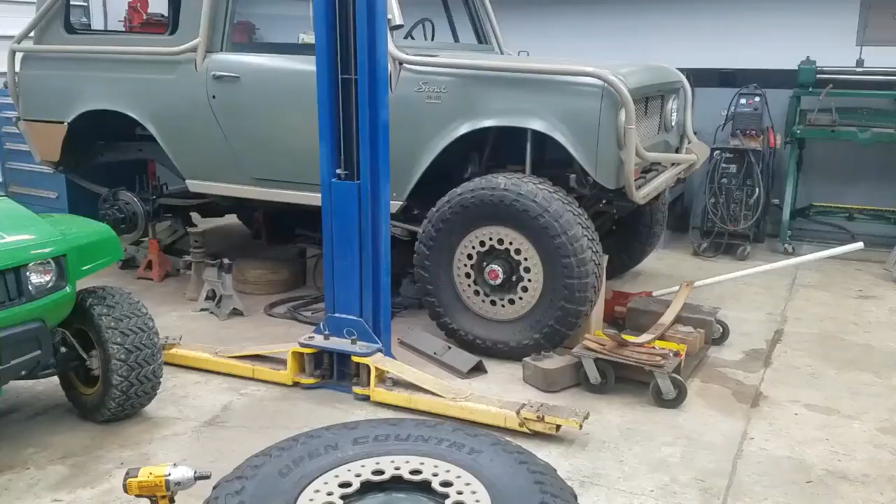All right, so today's mission is to do a little machine work to these beadlock wheels for the Scout. And I'll explain to you what a beadlock is. When you're doing off-roading, rock crawling, even going on to a sandy beach, it is ideal to have your tires aired down as low as possible, basically.

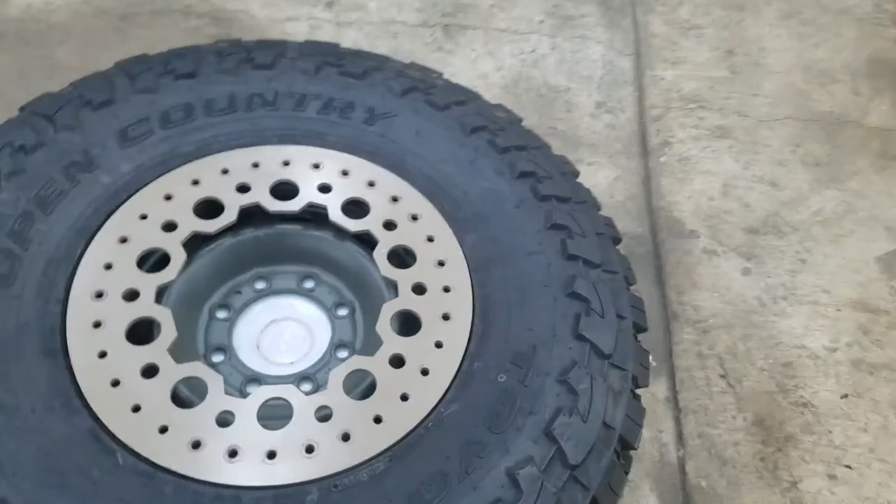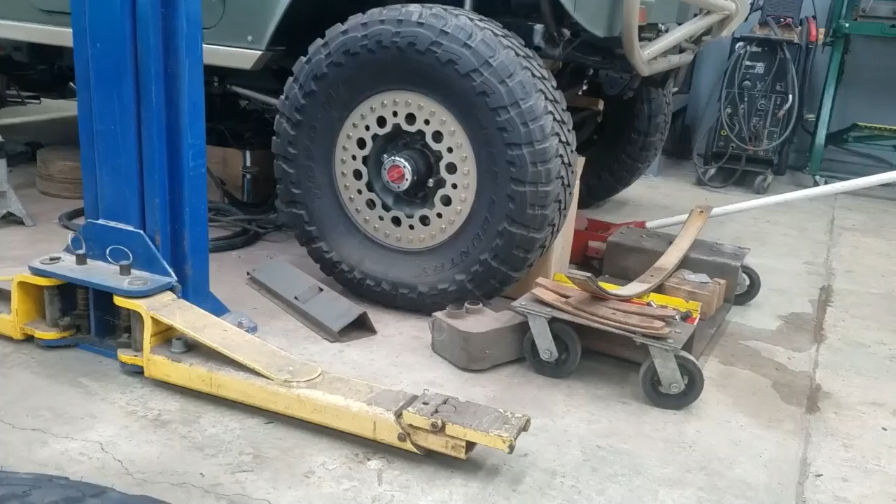Because what happens is, if you have a tire that is inflated rock hard, and the vehicle is sitting on the ground, it is going to form a radius with the ground. Very little contact. But if you notice on that tire, see how it's squatting down? That tire has a low air pressure in it, and it allows the bottom of the tire to conform to the surface it's on. If you're on a flat surface, it makes a big flat contact patch. If you're going up around a rock, it will kind of conform to the rock and grapple around it.

So, in order to deflate your tires, you let the air out. The problem with that, it is the very air inside of the tire that keeps it held to the wheel and keeps it sealed with the wheel. There's no tube inside of one of these modern tires. So, when we let the air out, down to a low pressure, the tire has a tendency to what we call unseat from the bead.

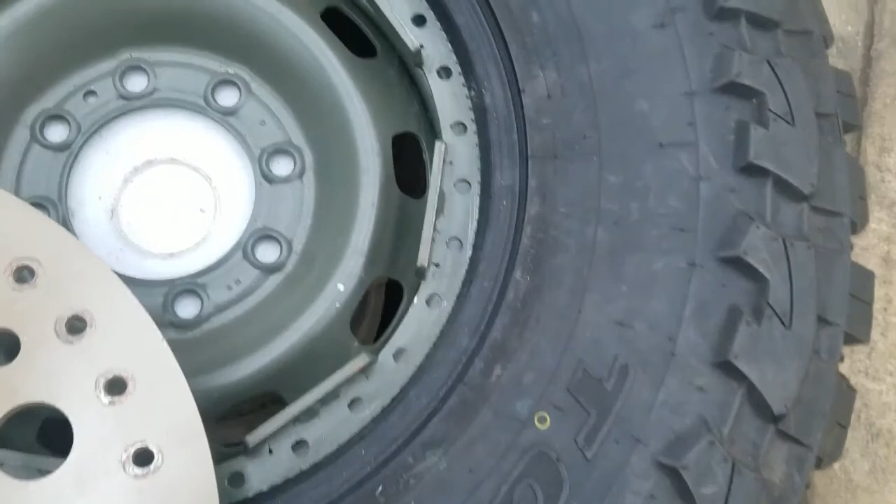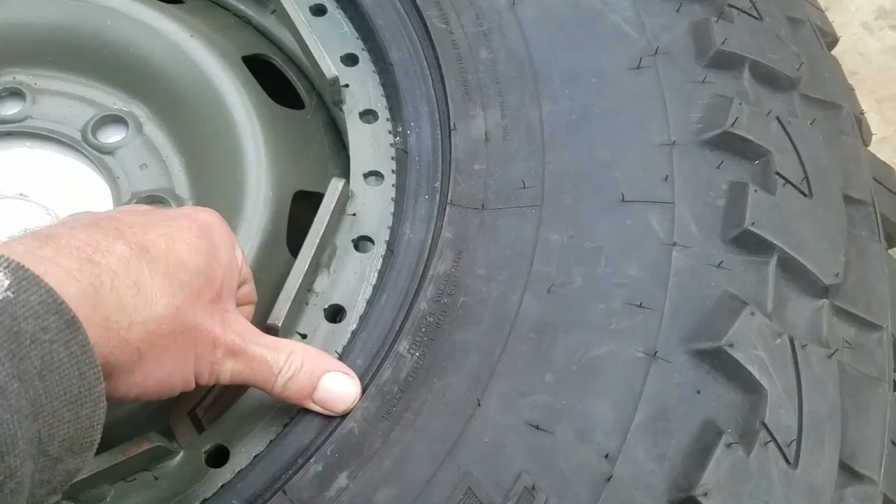So the bead is this area of the tire right here, and on a normal wheel, this would be wrapped around by the steel or aluminum of the wheel itself. So here's a junk tire. You can see how the wheel wraps around the tire and the rubber's underneath it. When it inflates, it forces against the wheel, creating a good seal. When you let the air out, you don't have enough pressure to maintain that seal, and the tire deflates at the worst possible time.

So the solution is to use a wheel that is called a beadlock, and that's what we're looking at right here. This wheel, basically, the tire is on the outside face of this surface right here. And what we were going to do is clamp the bead of the tire to this surface under a lot of force. And that way the pressure in the tire can be lessened and you still maintain a good seal. Keeps the tire from slipping, and you can do some hardcore off-road action.

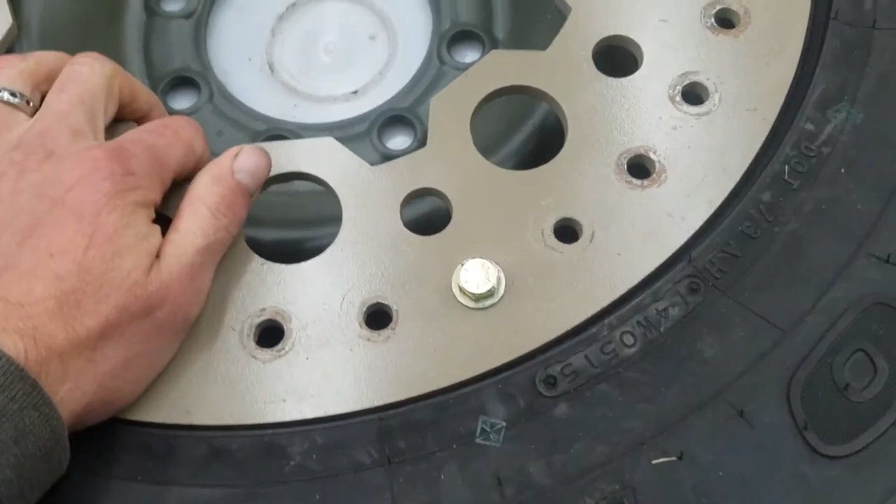So this is a beadlock ring, and the ring is secured to the wheel with 32 bolts. All right, so I'm going to rotate this so it lines up. All right, so one of those bolts goes down through there, and then if we look around underneath, the bolt protrudes, and we put a nut on the other side, and we do that 32 times around the wheel. That would normally be wonderful.

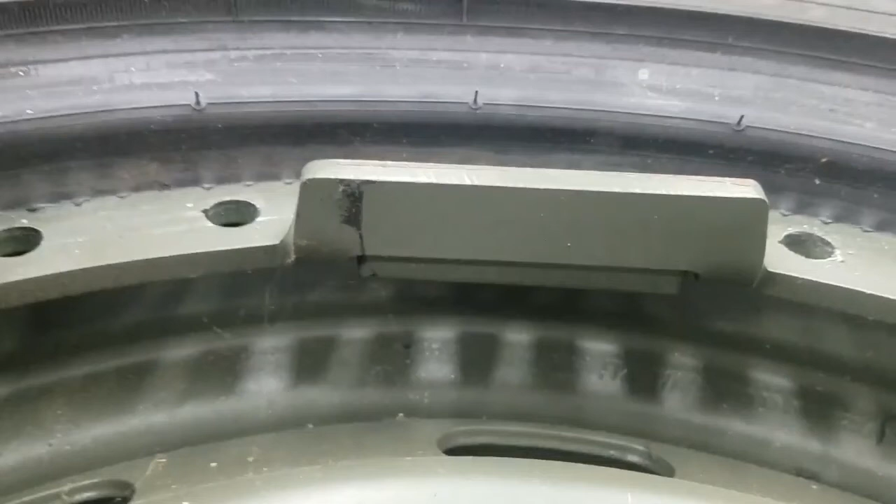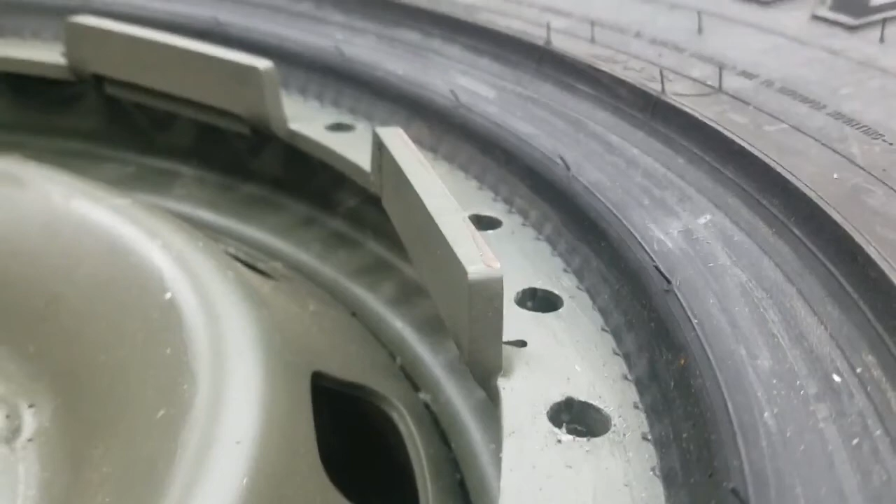The problem that I'm facing with this wheel is it was designed for a tire that had a thicker bead. All right, so I'm running these Toyo Open Country mud terrain tires, and the bead here has a thickness, but adjacent to the bead is this anti-coning lug. So the idea of what's supposed to happen is this piece of metal and this piece of rubber are basically supposed to be the same height.

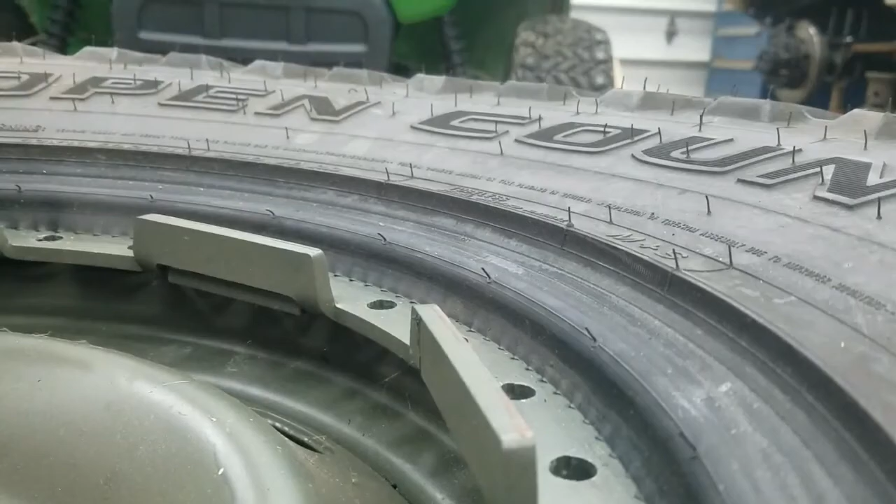And that way, when we put 32 bolts in here and we torque them to spec, the beadlock ring itself basically stays flat. It doesn't turn into a cone. If this was not here, all of those bolts and all of that force would cause the beadlock ring to cave in or turn into a cone. So by having this here to jack up the other side of the bolt, it allows good force and distribution of force onto the bead itself.

We have an anti-coning lug that is too high. All right, and this tire has a bead that is too small for it. The solution, we could get another tire.

That's not happening. These are pretty expensive. We could machine down these lugs so that they are shorter. That would require me dismounting all 4 of the tires that I already have mounted, putting them in a mill and machining them down. That's quite a bit of work.

The other problem with that is if I ever do change tires and I end up with one with a thicker bead, unfortunately the wheels will have been machined to the bead thickness of this one, and it kind of doesn't allow those wheels to work as well. So I came up with an alternate solution.

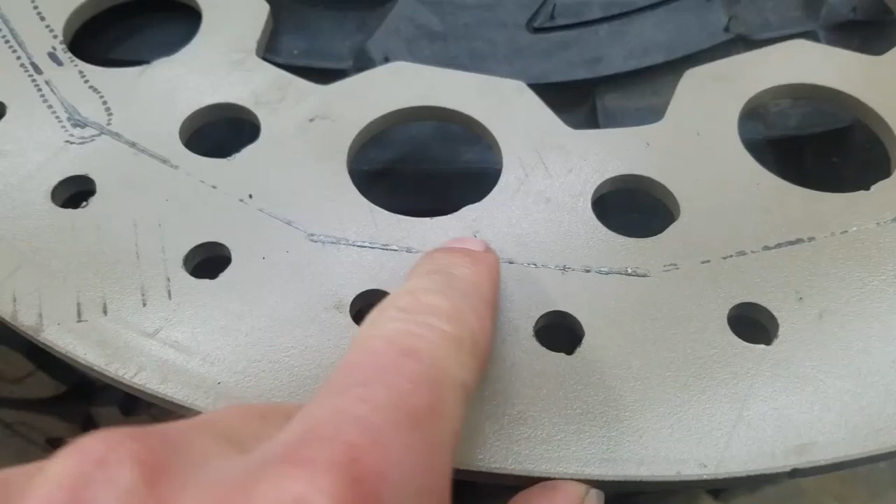I decided that if I took the beadlock ring and I flipped it over, you can see exactly where those lugs were contacting this ring. If I machined a slot that was the difference in thickness between the two so that the beadlock ring could sit lower, it would be a great solution, because I could use this ring in that position.

If I ever get a thicker tire, I can turn this 22 degrees or whatever it works out to be, and I could put it on a surface that has not been slotted. So that's what we're going to do. I kind of drew on here with a Sharpie roughly what that slot's going to look like. And this has 8 of these surfaces around the wheel. So 360 divided by 8, we got 45 degrees in between each one.

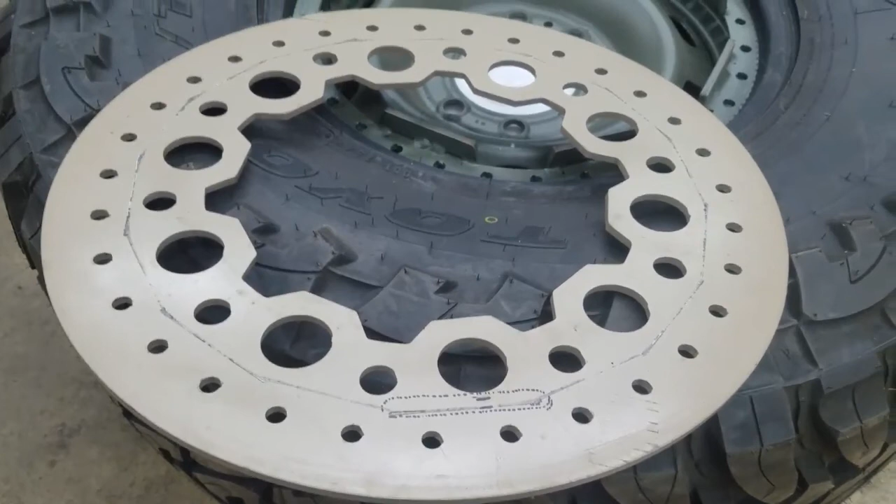So we're going to write a program, and it's going to cut the slot. So the slot at the 6 o'clock position would be here, but then we're going to take that slot that we program and we're going to rotate it to here and over to here and so on and so forth all the way around the ring. And we're going to utilize the rotation feature that we can program into a CNC mill.

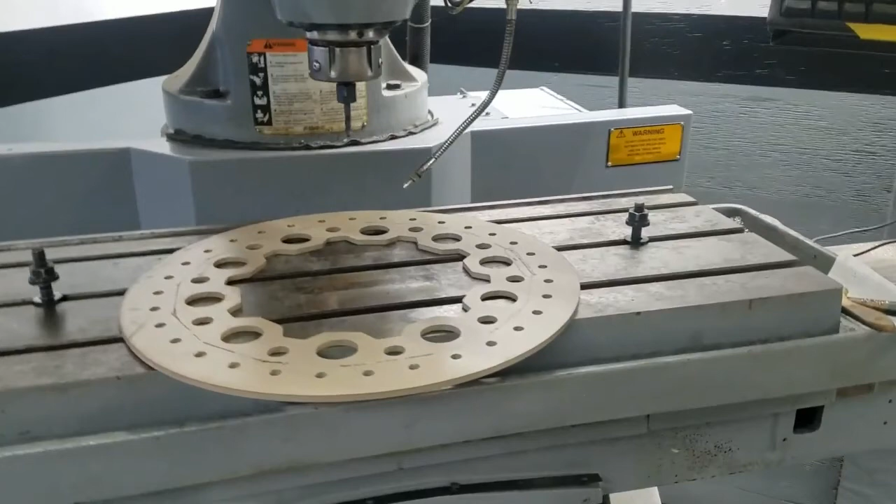Okay, so I have the part sitting on the mill table. I have not bolted it down, but I am kind of getting an idea of how much axis travel I have. Now, of course, I am shy by 2 inches in the Y. I have 14 and I need 16. I've got plenty of X, but it's the Y that's going to catch me.

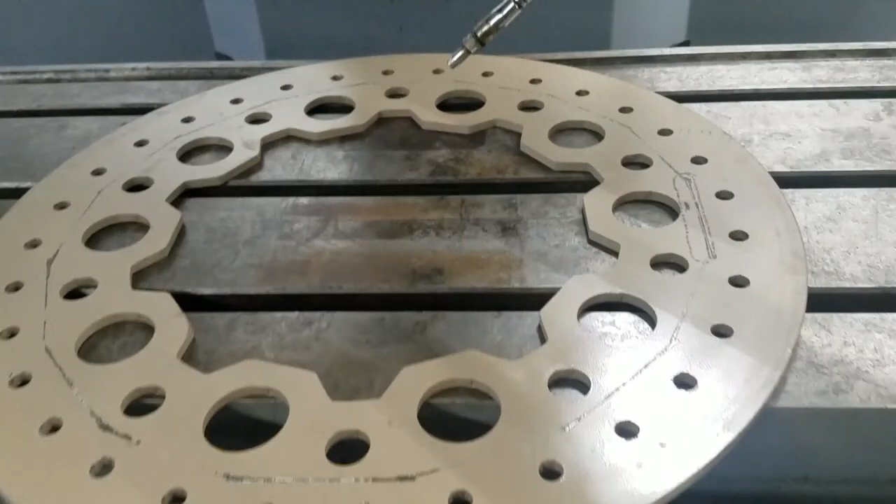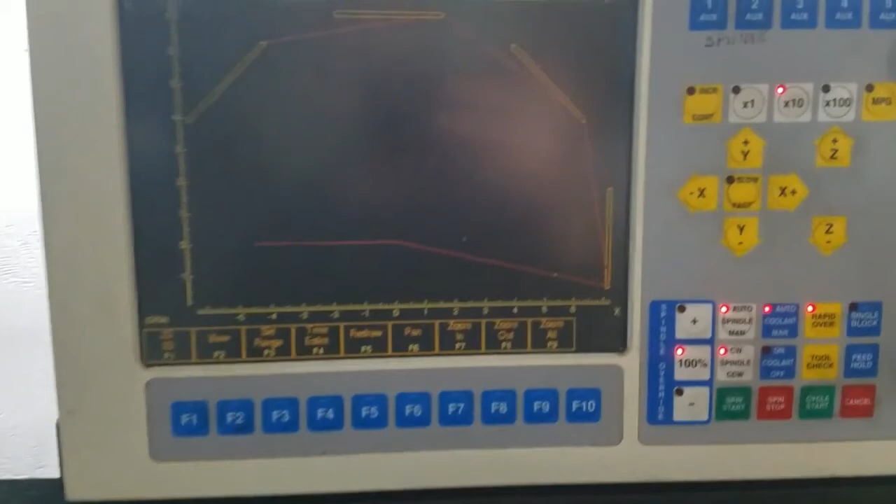So what I've decided to do is to break this down into 2 different parts. We're going to mill this one, this one, this one, and this one. Okay, that's going to get us 4 of the 8. In other words, we are going to be able to mill 4 of the slots of the 8. We're going to rotate the part 180 degrees and use the same program to machine the other 4. So this is basically what the program is going to look like, and I'm going to show you how I program that using rotation next.

Here we are in the simulator. I've written a contour that uses an end mill, and it goes around in this oval shape. I chose to do it this way instead of plunging the tool and going right down the center to create the slot. It's better to use a smaller tool and to actually turn this into a pocketing or a contouring toolpath. Gives us better surface finishes, better accuracy, and so that's what I ended up doing. The result here is basically to give me a slot exactly to the dimensions that I want.

So I wrote that one instance. Now, we need to do 8 of these that are rotated around that circular part. So there's going to be 8 instances. Each one is at a different position on that circle. And we have a trick for doing that. Our programming codes in FANUC formats allow for a G68 code, which will rotate everything that you program on the coordinate plane. So this is pretty slick.

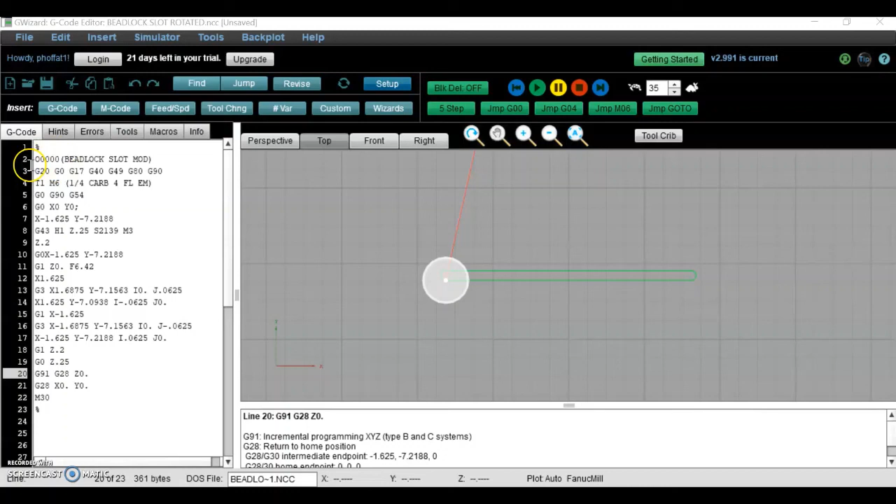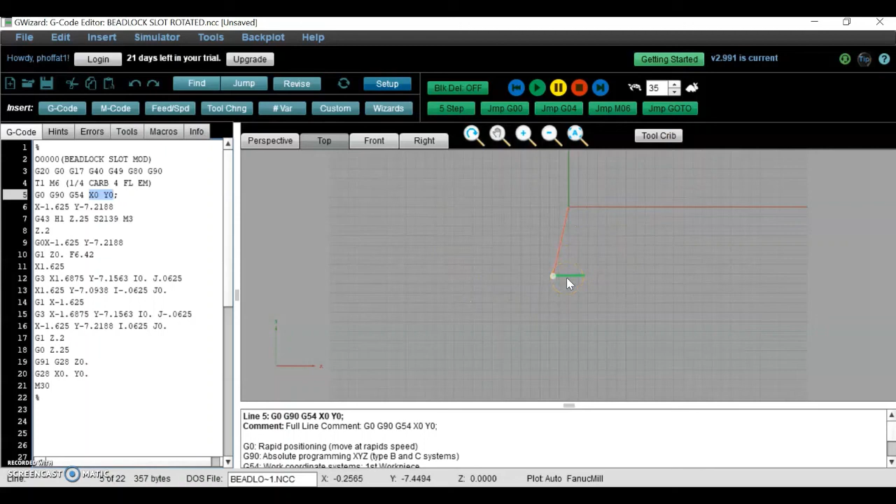And just to take you through the program before we incorporate that, standard stuff, program number, safe start, we load the tool, and I have it rapid into the center position of the circle, which I've defined as the origin. All right, so in other words, to zoom out, this is the center of that circular part. Now you can't see the part on here, but that's the center of it, and this is where the one slot is going to be machined in reference to that.

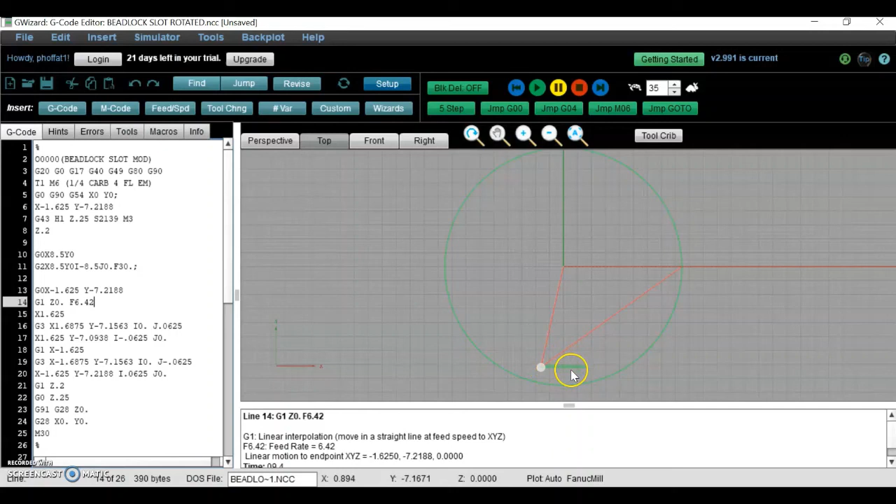So I went out on the machine and I mocked up this setup, and I discovered that with the size of the part and where the column of the machine is, I don't have enough travel to get to this one slot. I'm short by like half an inch to an inch.

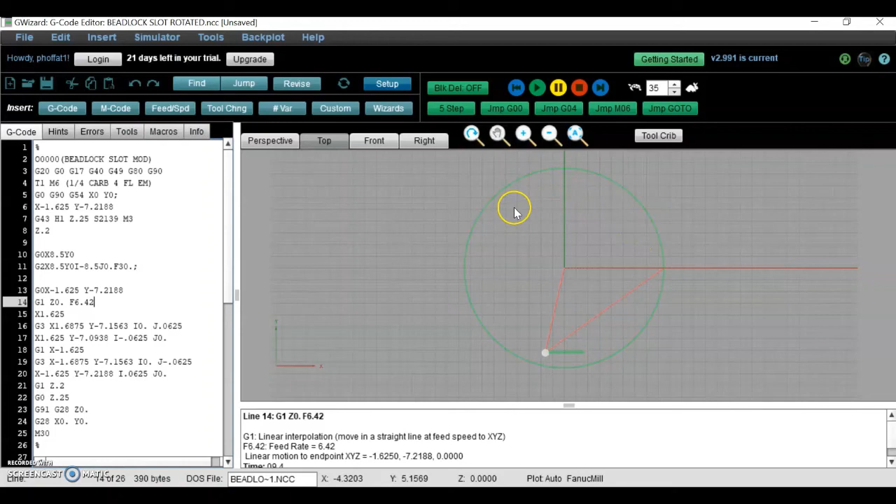So I think I mentioned earlier, what I'm going to do is I'm going to cut this slot here at the 3 o'clock position first. And I'm going to cut the slot here. And then I'm going to cut the slot at 12 o'clock and then the slot here. That's going to give me 4 slots. And I can rotate the part later 180 degrees, cut that same program, and that will give me access to the other 4 slots.

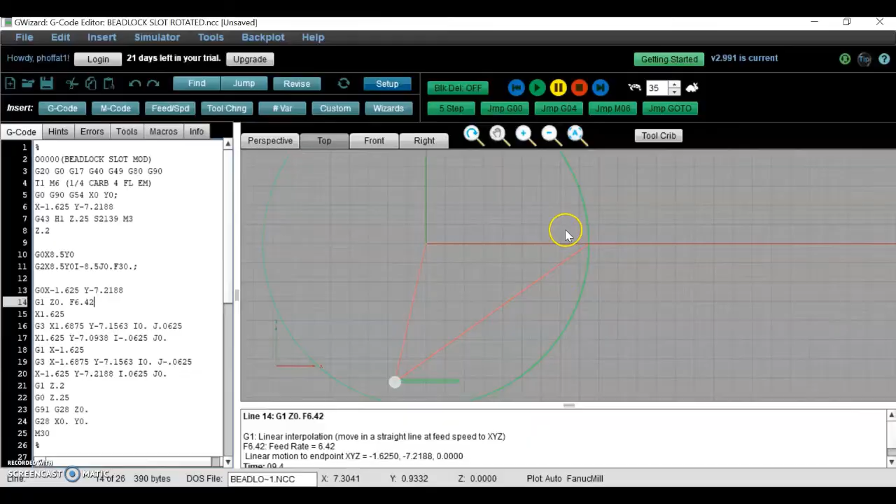Okay, so unfortunately, I programmed the first slot here at 6 o'clock position, which is a position I can't even get to. So I could reprogram that slot contouring operation for a vertical orientation right here at 3 o'clock position, or I could invert all of my positives and negatives and cut it up here at 12 o'clock position. Positives and negatives in the Y, I should say.

But I'm going to go ahead and just jump into the benefits of the G68 code, and I'm going to rotate that slot exactly where I want it. Okay, so I'm just going to create some space in my program. This movement right here rapids to that very first start point for the slot.

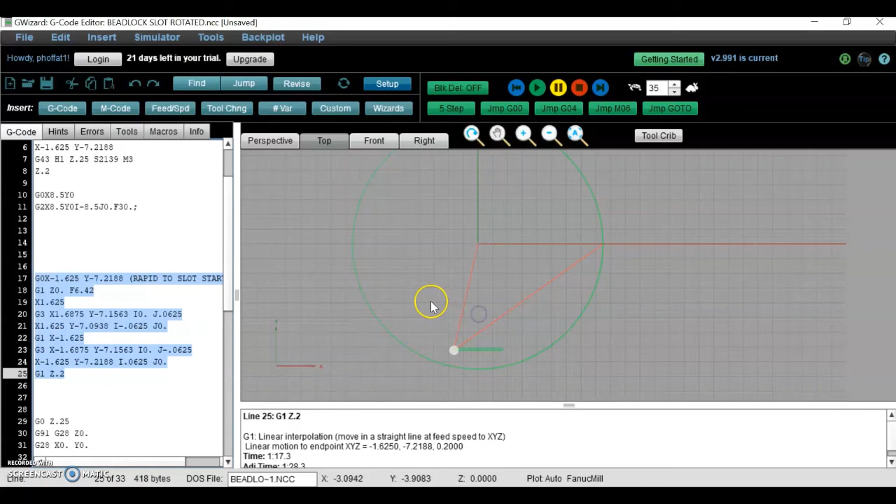Okay, and then it plunges to depth, it feeds linearly in the X, it cuts the arc, feeds linearly, no, it cuts another arc, feeds a linear arc, and then it lifts up. Okay, so this package right here is everything that is utilized in order to cut that one slot. So what I'm going to do is I'm going to take that one slot, I'm going to rotate it.

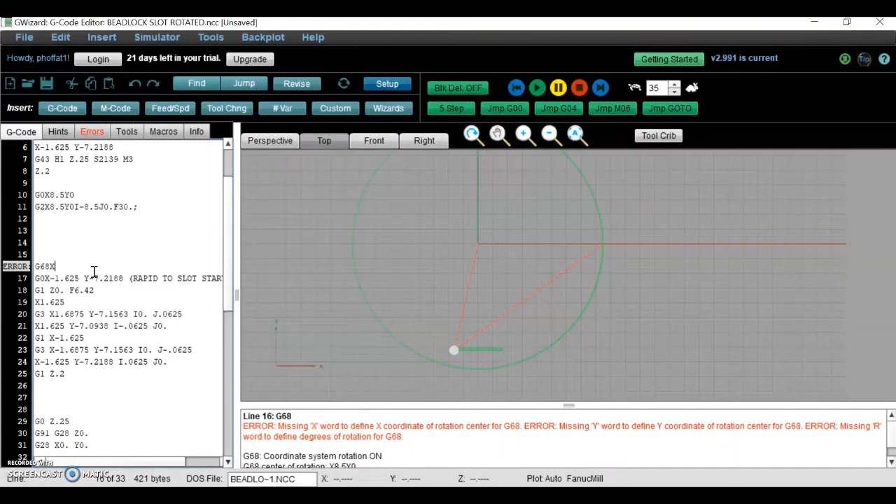So right before that sequence of operations that cuts the slot, I'm going to throw in a G code that is G68. I am going to put the X and Y position of the center of rotation. In other words, I want my slots to rotate on this circle, and the center of the circle is smack dab in the middle of the part at X0, Y0.

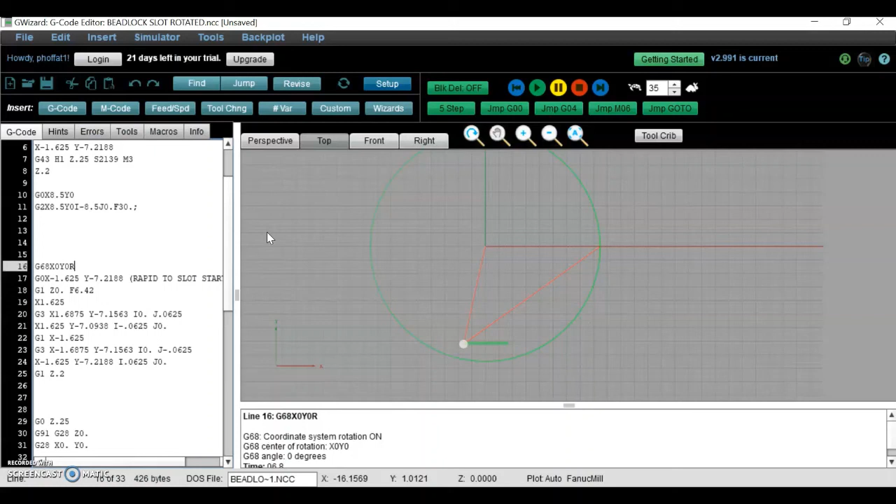That is the center point of rotation. If you were to draw this circle, that's where you would put the compass point. So I'm going to call that center point of rotation X0, Y0. And then finally, I put an R value in, and R doesn't mean radius here. In the context of the G68 line, R means rotate. So I'm going to put the number of degrees that I want it to rotate.

And right here is where it created the first one. I don't want it to be here. I want it to be 90 degrees out of phase from here. So my rotation angle will be 90 point. And did you see what just happened? That was it. That's all I had to do.

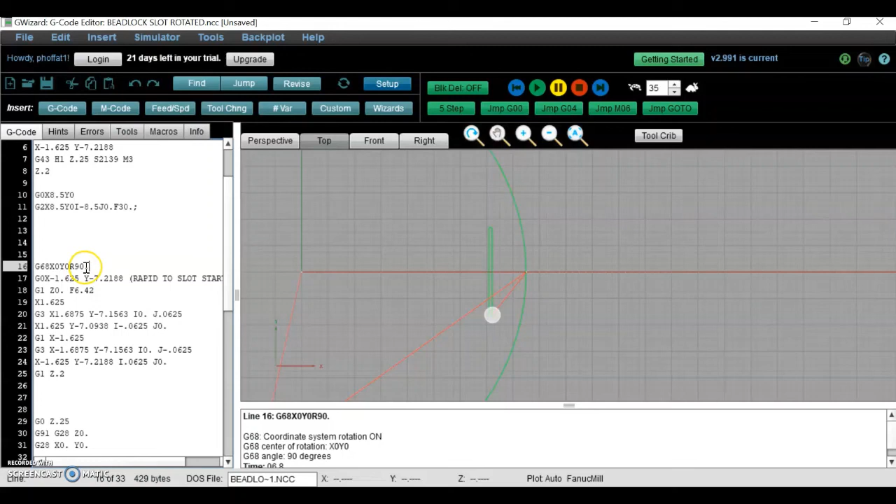G68, the center point of rotation at the origin, and R, the number of degrees that I wanted it to rotate. And then it rotated the whole coordinate plane and it ran down through here and cut out that slot. Okay, so that is the first instance. I'm just going to put a little break here.

Rotate and cut slot 1, and make it real visible for everyone. And I'm going to copy this, and, I don't think I copied it right. At the end of that particular operation there, it is going to get another flag, another marker, and we're going to call this, just call it end of slot 1.

All right, so it's real plain to see what's going on there. Then the next thing I should point out is I could use a sub-programming technique. I could use a macro technique. I'm going to keep it simple. I want you to focus just on how this G68 code works.

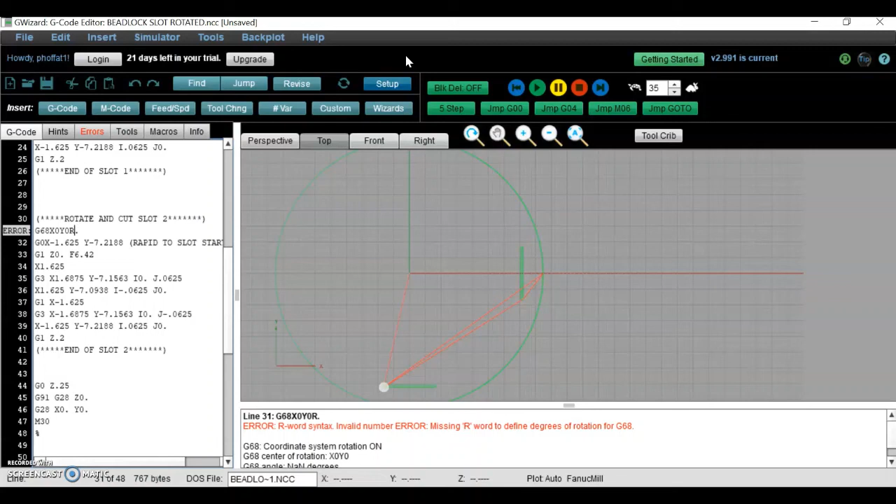So instead of 90 degrees, my rotation angle is going to be 45 degrees further than the one it just cut. So in other words, the one that was just cut was cut at 90 degrees. The next one's going to be cut 45 degrees further than that one, for a total of 135 degrees from where that first toolpath was written. And there we go. So we can see that slot in position where we want it.

I'm going to copy this, and we're going to paste another one. This is going to be for slot 3. And here we're not going to use 135 degrees. We are going to go 45 degrees further, and that would be a total of 180 degrees. So there you see it. So slot 1, slot 2, slot 3.

And now I'm going to go on to the next one, slot 4. And this is going to be the final one for this program. So we are going to take 180 and we're going to tack on 45 degrees to it, which is 225 degrees. And that gives us the final one that we're looking for. So slot 1 here, slot 2 here, slot 3 here, slot 4 here. That gives us half of the slots that we need.

So when I get out to the machine, I'm going to cut them because I have travel to get to those, and then I'm going to rotate the part 180 degrees, and I'm going to, on the same part, cut the same program at different orientation, and that's going to give me slot 5, 6, 7, and 8.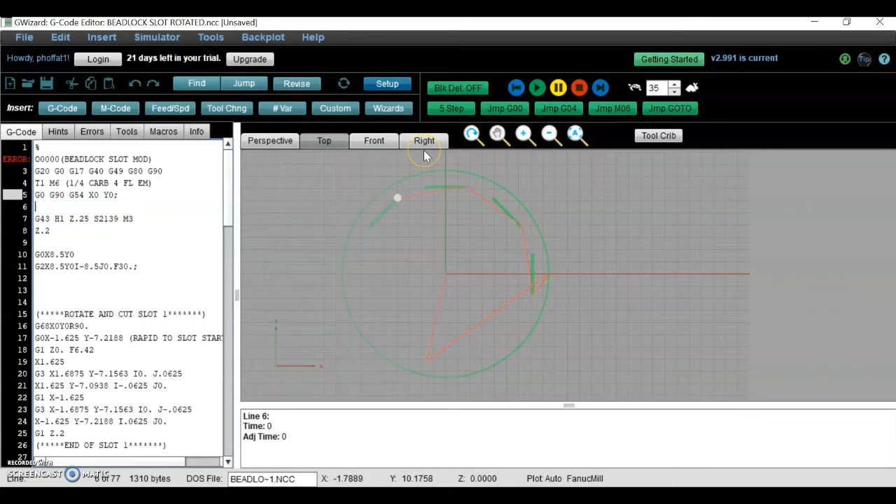Okay. Now there's one thing I want to clean up here. It's rapiding right here to that position. So up earlier in my program, yeah, right here, it's doing a positioning move to where it thought the very first slot start position would be, which was this guy. But at that point, there's no coordinate system rotation yet. So I'm just going to delete that. That's a little bit redundant. And hopefully that goes away for me. There we go. That took a little while.

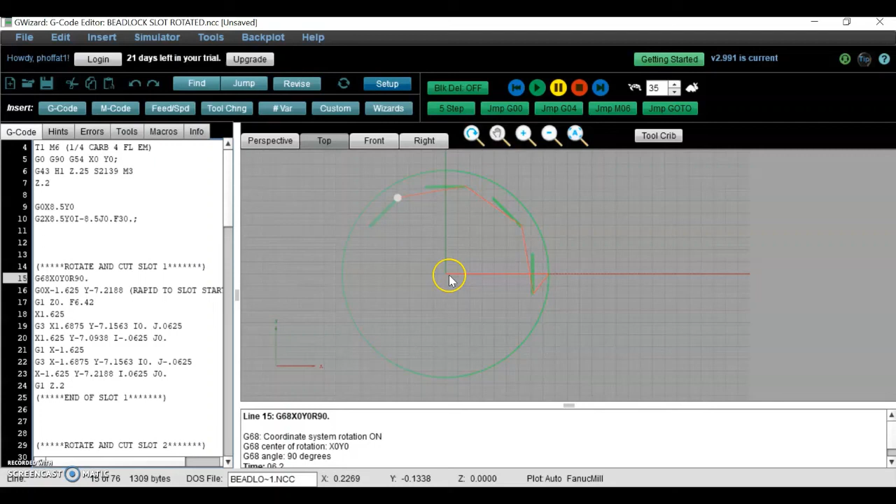All right, so just to recap, G68, pretty simple. You throw that code in and you give it an R value for how much you want it to rotate your coordinate system. Everything that you program is going to go for a ride on an angle. And we define where the center point of rotation is for that whole rotation scheme. And I use the origin because conveniently that's where I place the origin on the part, right in the center of the whole works. And that's it. So now we're going to give it a try on the machine.

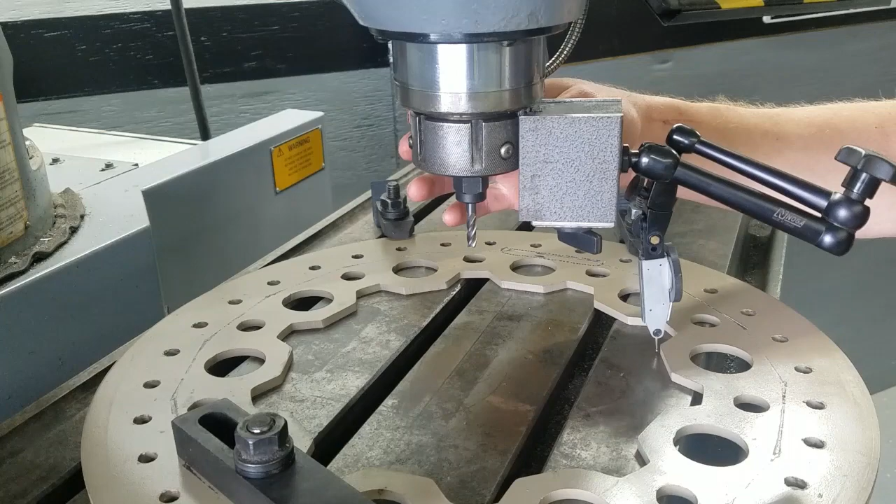So I've mounted up a Noga indicator. After clamping the part down to the table, I've swept around the interior surface. Now this is a laser cut part, so it is a little irregular. We've got a little bit of a draft angle or taper on the cut. So I've just gone around it and gotten the indicator to be a happy average between all of these interior surfaces, and that places the spindle center line in the center of the part feature. I'm now going to call this X0, Y0.

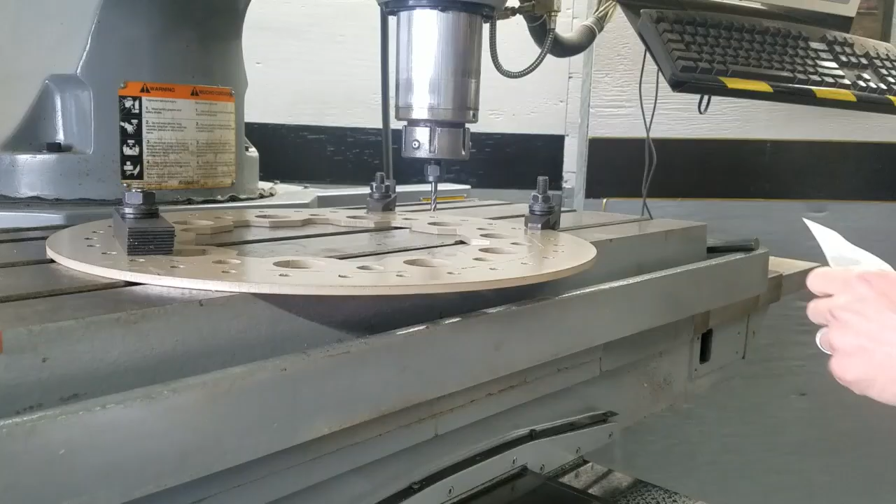And now I'm going to bring the Z-axis down, and we're going to get a touch off of this piece of paper, and we're going to qualify the tool based on this position. Okay, and there's a light drag with the paper. That places the tool 4 thousandths away from the surface that I want to be Z0. So I'm going to qualify this tool accordingly, and there we go. All right, so we're going to try it.

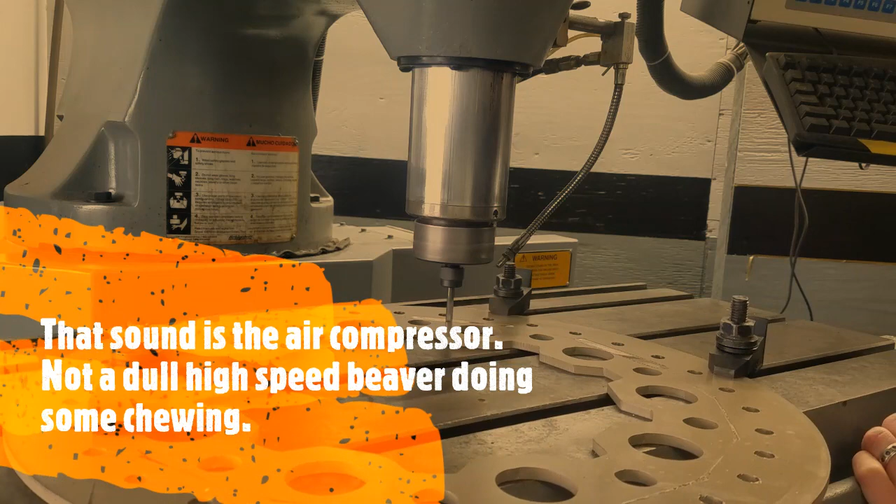Okay, so looks about right. I've got to move that last clamp. I wasn't really thinking, and it's in the wrong place. So I'm going to move that, and then the scratch pass looks good, so we're going to go to full depth, and we're going to cut it. All right, fire in the hole.

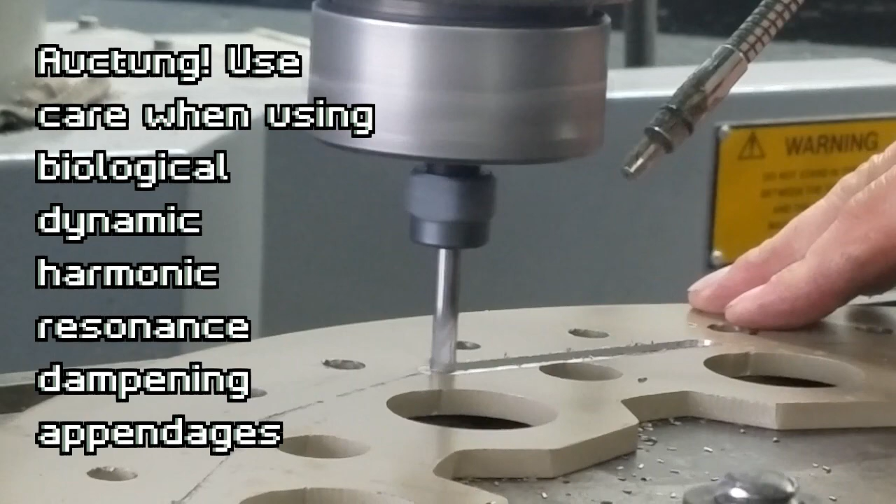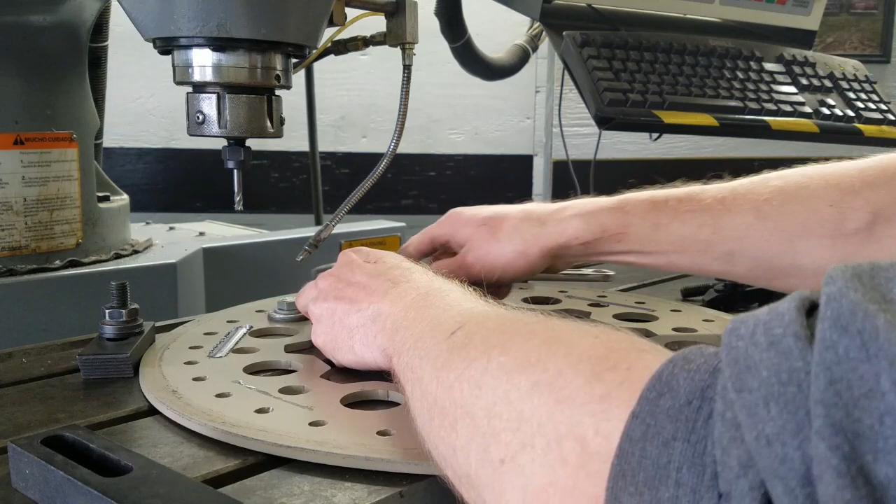Everything has been cut. For this section of the part, we have 4 of these slots cut. Now we're going to rotate this 180 degrees, and we're going to do the other 4. So I thought I'd take a moment and show you a little bit about how I set this part up. I have these hold downs and step clamps, and you're all familiar with how those work. But these two right here are not merely clamps. What I did was I took some step clamps and I utilized them so they serve as a stop.

So what's going to happen here is, as I need to rotate this part 180 degrees, I don't want to have to indicate it again. And in fact, when I get the second or the third and the fourth beadlock ring, I don't want to have to indicate those either. So these I have bolted down to the table, and when I placed this in here, I located it against there. That served as a V-block in essence, a vertically oriented V-block, and that aligns this right in place.

So what I've got to do now is I've got to spin this 180 degrees. And when I put it into place, it should go something like that. It's going to cut this slot, this slot, this slot, and this slot, bringing us over to the last slot that we cut and completing the part. So theoretically, when I clamp this down, my XY location should be good.

Now I am going to also show you how I went about orienting this, because I want these slots to be oriented with these holes, because they have to match up with the anti-coning lug that's on the wheel itself. So what I did, this is down and dirty for a machinist, but you know, we have to consider what our allowable tolerances are. On a wheel and tire, on a rock crawler, we're not required to work to 5 thousandths tolerance. We're sometimes not held to plus or minus 10. Sometimes it's far looser than that.

So I'm going to secure this. I'm going to double check that we have a relatively accurate XY location, and then I'm going to cut the remaining slots, and this part will be finished. Redo.

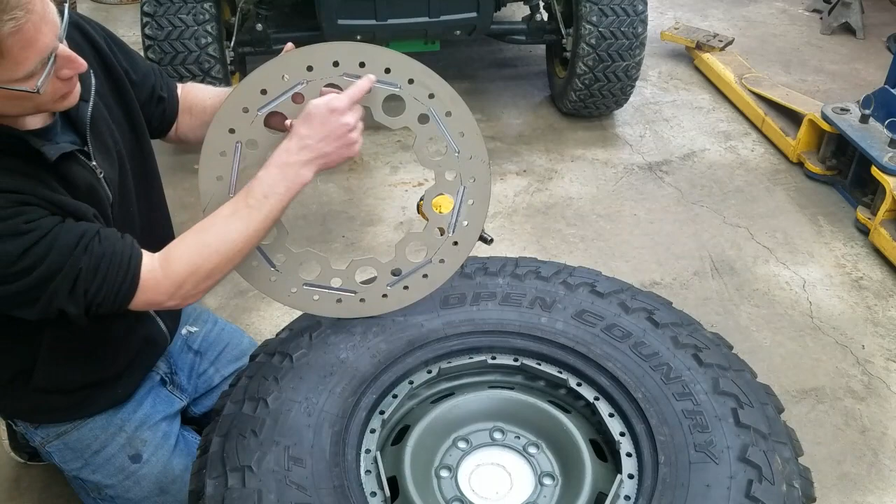We have all of these receiver grooves to match up with here. So I'm going to place it on, and we're going to put some bolts in it, tighten it down, and see if it worked. Okay.

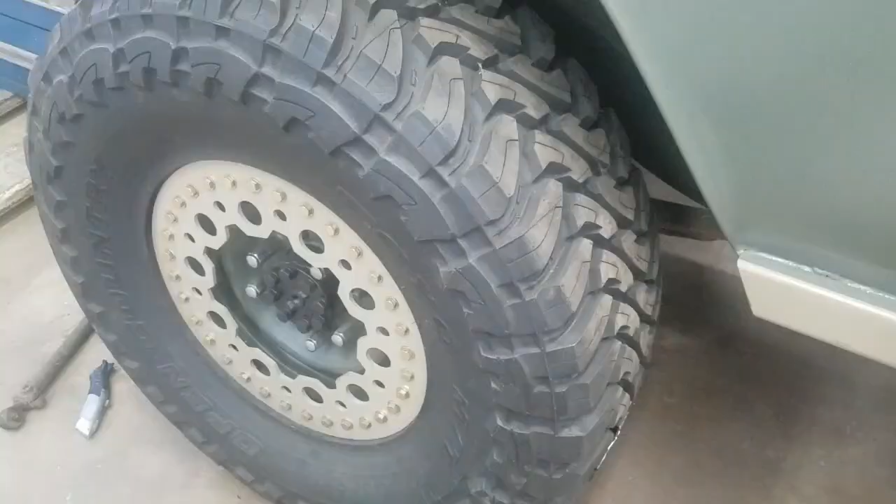So there you have it. That is a completed beadlock wheel. It's been holding air for about a week now and no leaks. So we did a successful job modifying that, and now we are ready to go wheeling.